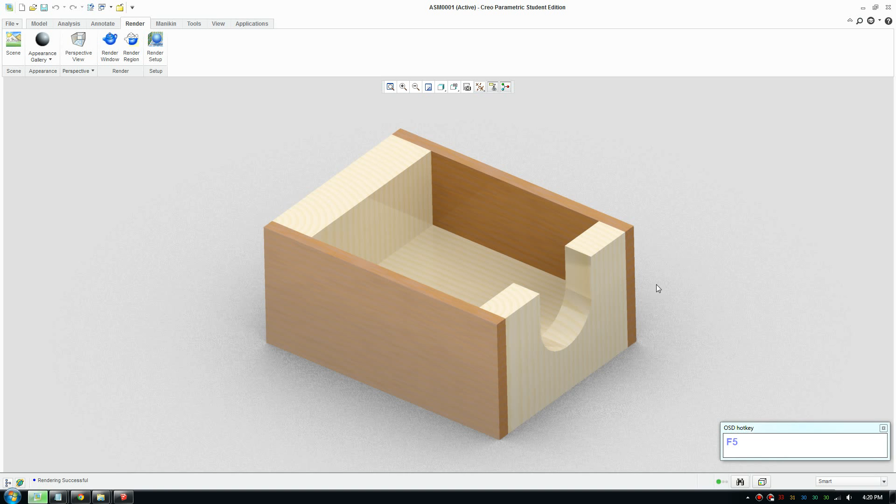Today I'm gonna show you how to model and assemble a post-it note holder. This is a simple product with only a few simple parts. I'll show you how to model them and also how to assemble them together, so just a quick simple product.

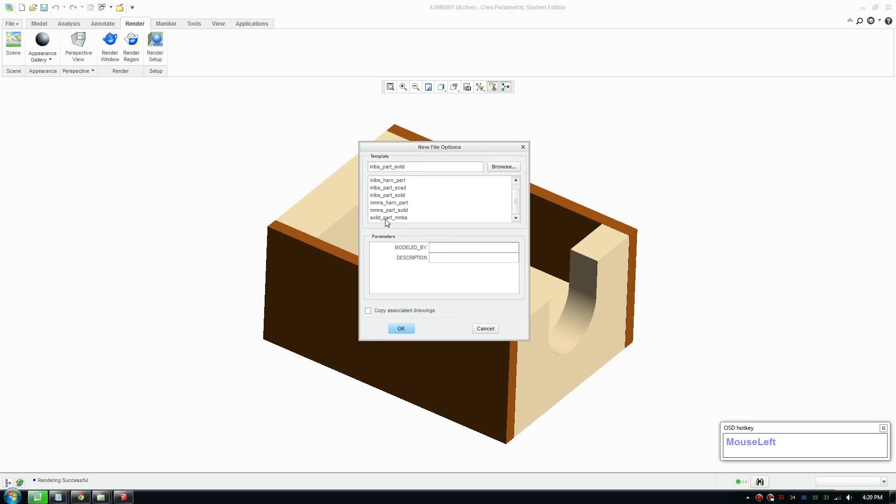So this is a post-it note holder. We're gonna make a new file, pick parts, and start with the front piece. Give a name, front piece, and make sure to untick use default. We want to select the solid part, millimeter, kilogram, second, which will make sure the units are millimeters, and we'll turn on the planes and the axis.

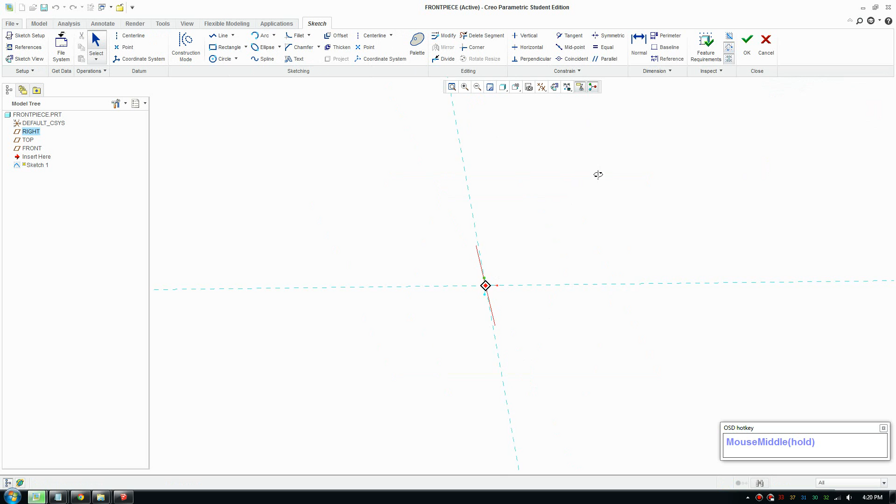We'll start by clicking sketch, click the front plane, and click sketch. We can click this button to flatten it out and create a rectangle, and make it 50 by 70.

Next we'll draw a circle somewhere in the center for us to pull the post-it notes out. Put in half the size of the width, so 35, half of 70, and here make it 25.

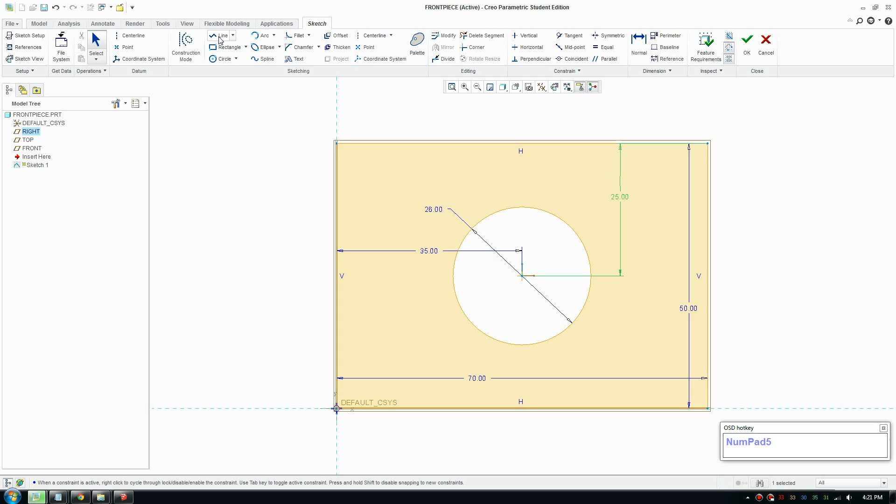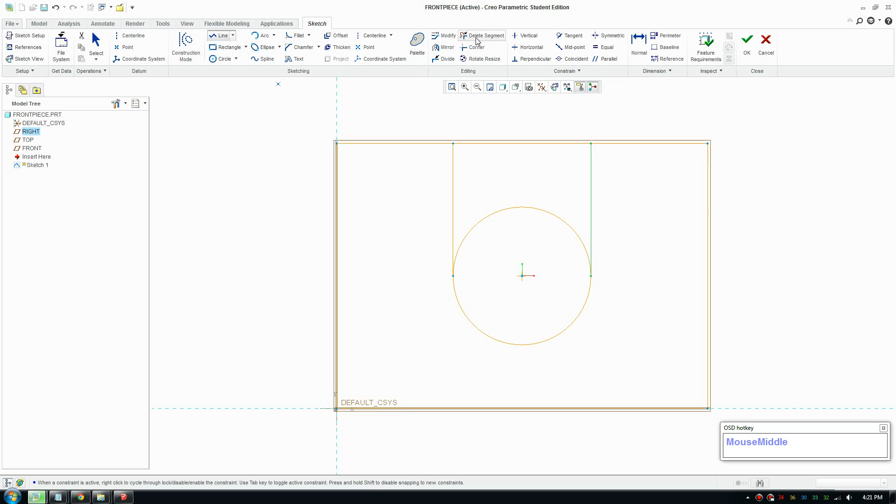Next we also use a line tool here. Press the middle mouse button to get out of it, start a new line, and make sure you select right on the side. So we have our lines and shape tools, our line modification tools here, and also this button here deletes a segment. We want to delete this line, so it makes a shape.

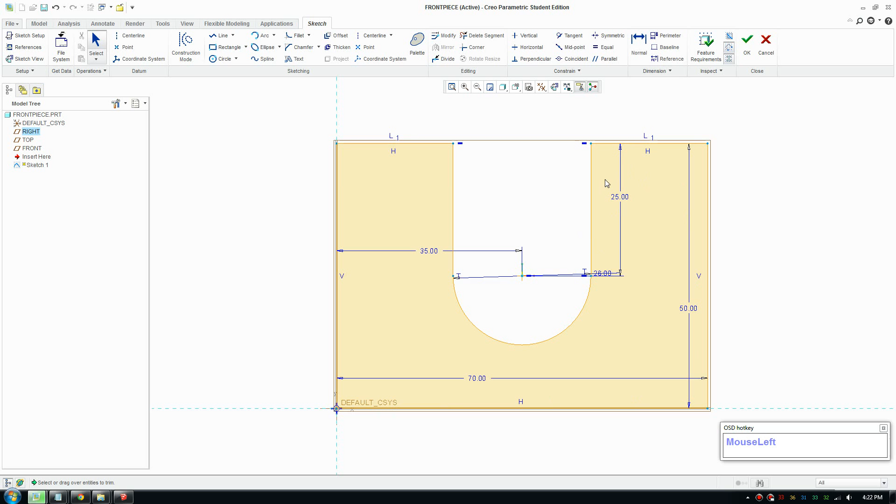Just be aware when we extrude things, when we click our sketch, make sure it's yellow like this. Make sure the shape is a loop all the way around, so it's a nice plain loop without any lines crossing, which is very important for the program to extrude correctly. If there's lines crossing over it, it'll leave an error for the mathematical calculation.

So here we'll just give a thickness of 12 mil. Okay, that's good. Now we go ahead and make the next piece.

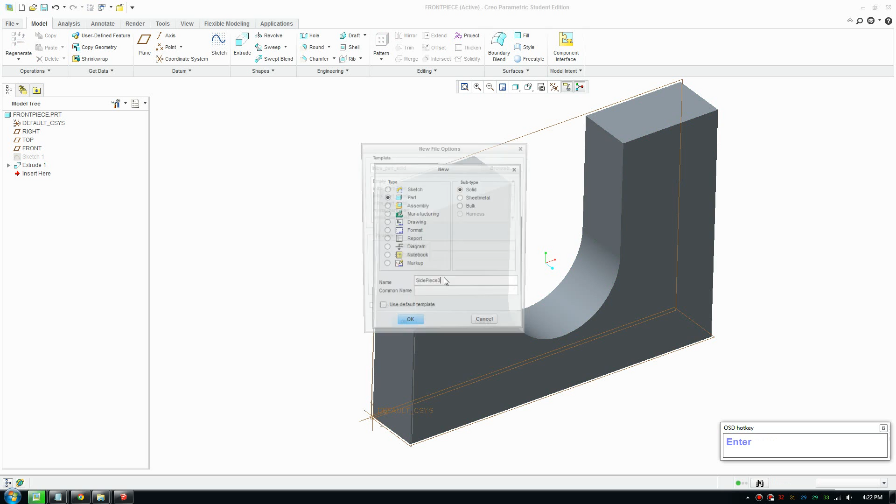Let's go file new again. We'll make another part, a side piece. For each part, if it's already in use, we'll pick another name, and make sure you untick default. Name it number 3. So basically each part in real life, you're gonna model as another part in Creo Parametric.

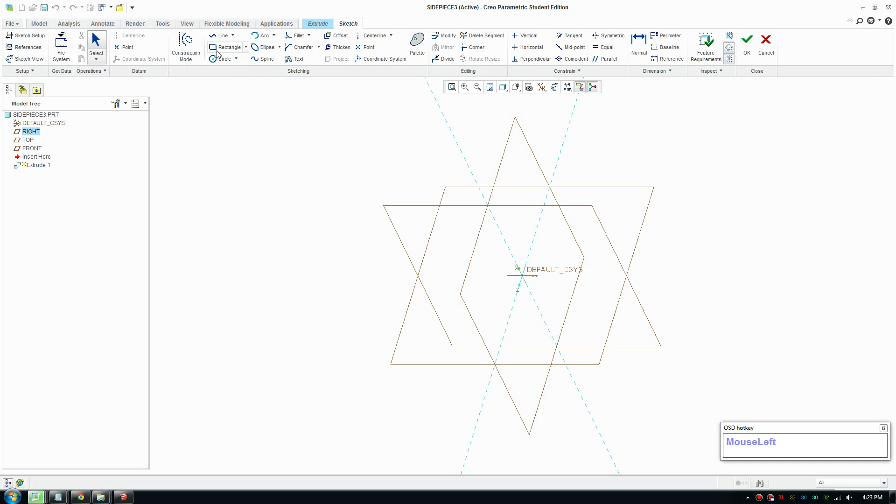Now we're gonna make a side piece, which is a simple square shape. So draw that out and draw a square shape. You can use the middle mouse button to rotate, and maybe click this button to rotate it flat.

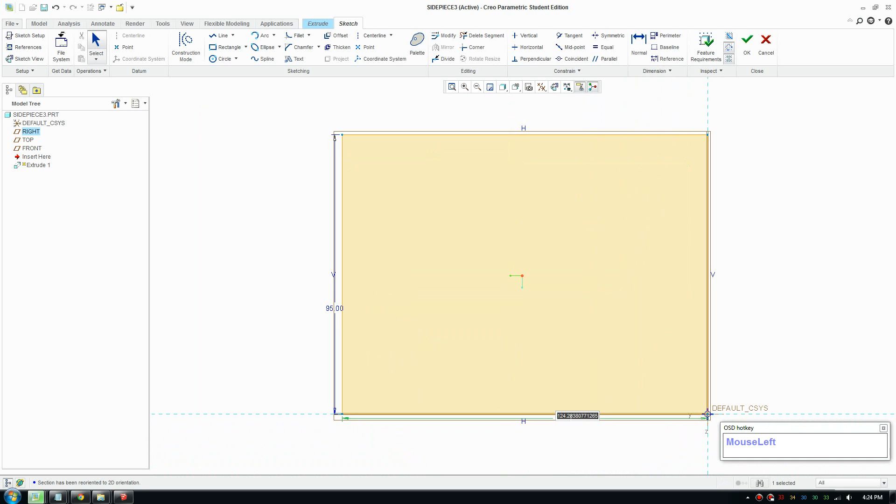And we'll give it a dimension. So the length is 95, the width is 50. It should be like that.

And we'll click accept and extrude. This little mark there will let us extrude. We'll make the thickness about 4 mil, since this is actually plywood. We're gonna use plywood for the side, and we're good with that.

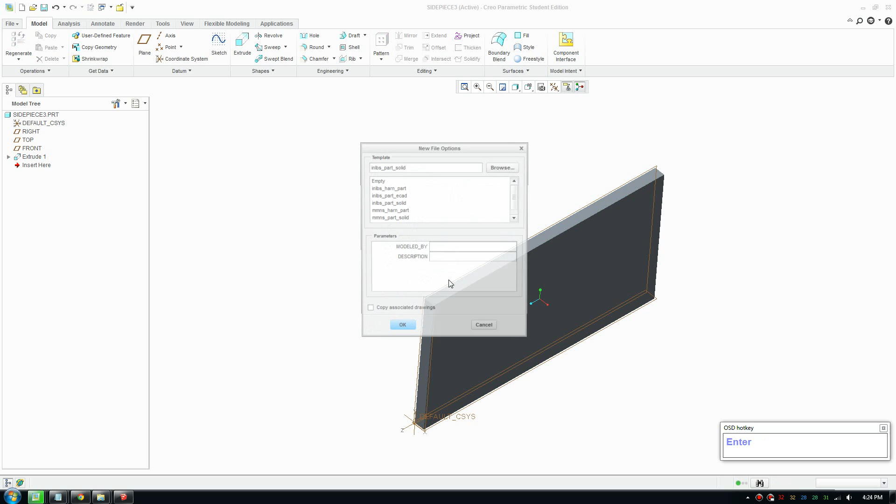Now we'll make the next one. So file new again, and next will be the back piece. Untick the box, give it another name, pick millimeters, make sure you get the units right.

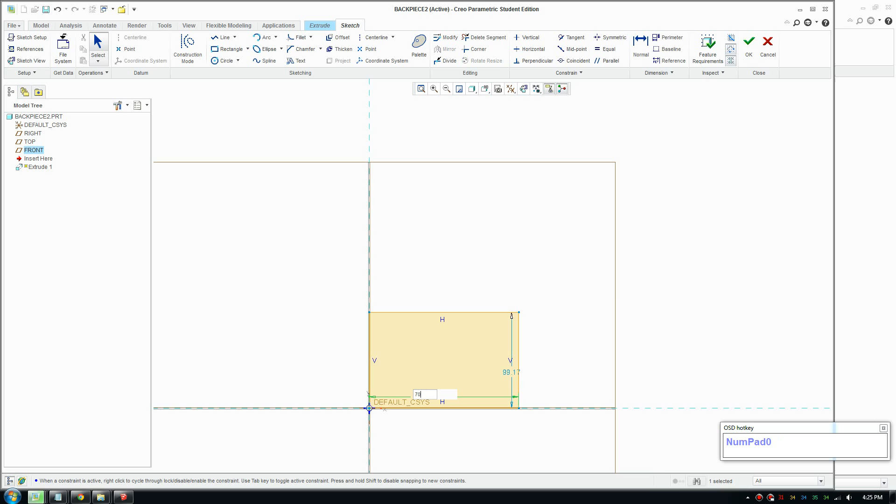Sometimes you can just go straight into extrude. Open the plane up and draw the back piece. Back piece should be 70 by 50, and accept that. And this time it's 18 mil.

We'll want to make a different type of timber for the back piece, and accept that, and we have pretty much everything.

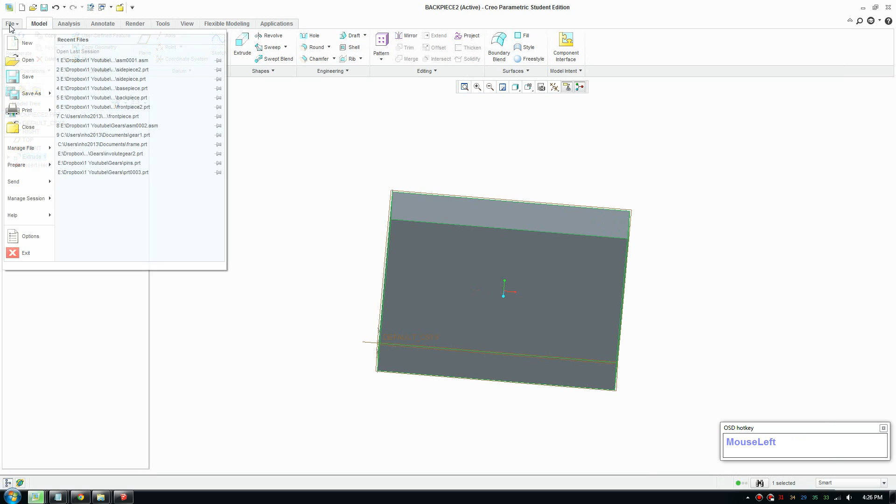Okay, so we'll have to make one more piece, which is the base. Give it a name, click OK. If it's in use, give it another file name and switch to millimeters.

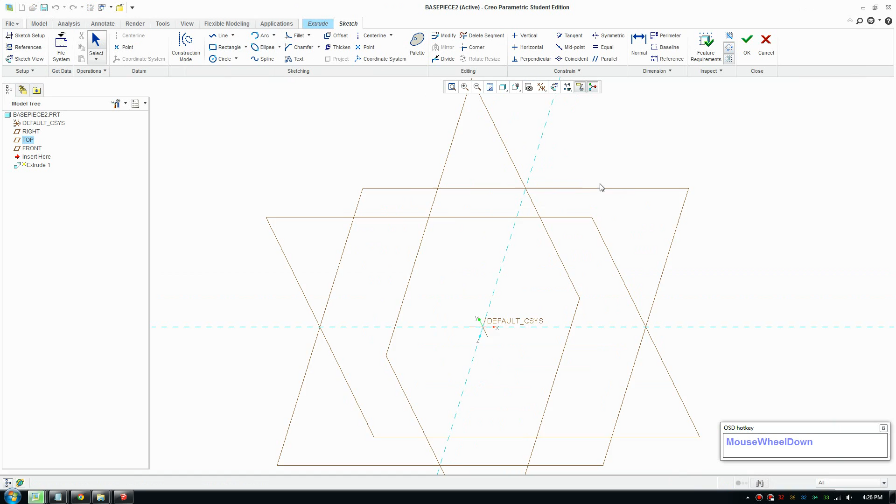Click OK. And for the base, we're going to use the top plane just to make it associated with the orientation. The base piece, we know that it's 70 width and I think it's 77 height.

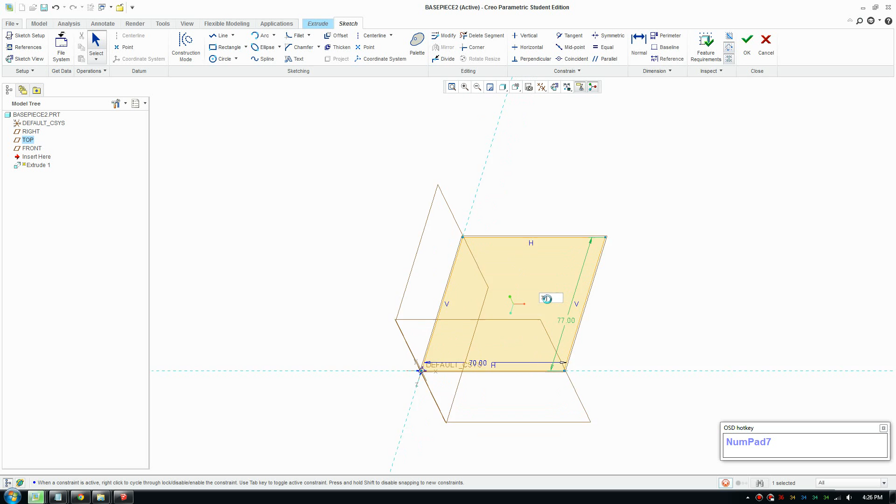Let's accept that, and this time we're gonna use 18 mil thick timber. And accept. Now we're ready to assemble this together.

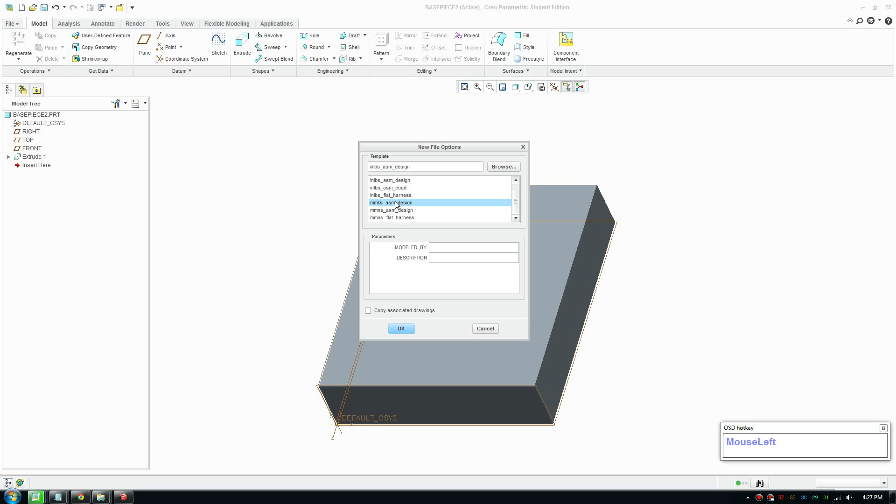So go make a new file and go to assembly. Assembly basically puts all your parts together. Untick the box on the bottom, and we want to use millimeters. Click the right units and we're ready to go.

Okay, alright, so bring your parts in. When you bring your parts in, make sure you pick the first one that is the primary shape.

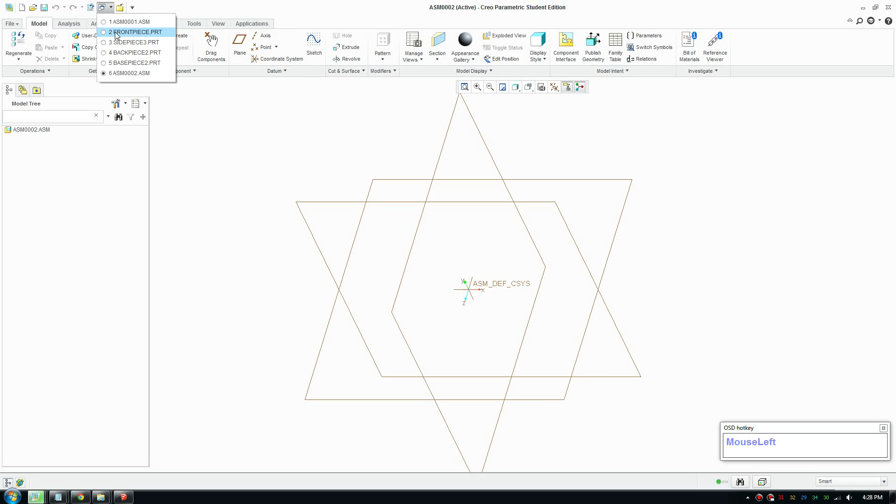Okay, looks like I can't find my files. I think I need to go and save it. So to go to your previous file, you click this button and switch between the other parts, and go file save. I'll save this in my documents and I'll move on.

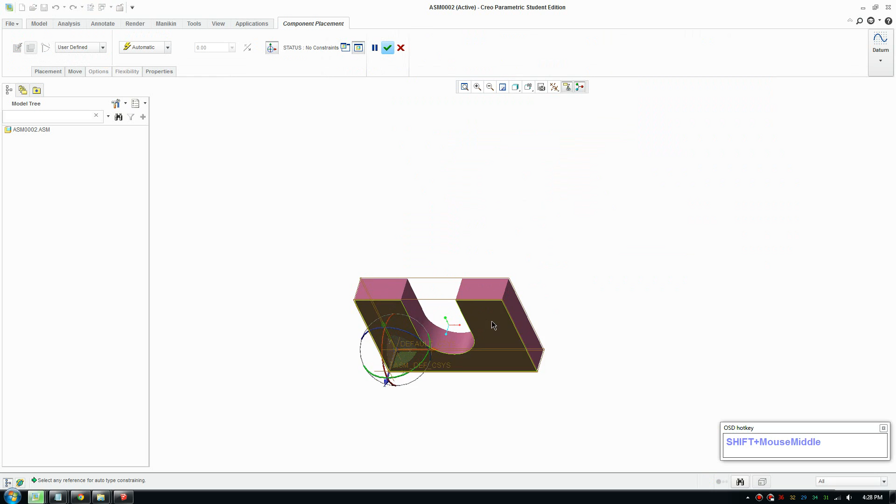Save your next one, back piece, save it all in the same folder, my documents, and we'll go back to assembly and bring in the first piece. So the first piece is the front piece. Alright, so be aware for the first piece we gotta put it into the default.

Default just matches the 0 coordinates with the part and the coordinates of the assembly. So that's fine. I'll bring in the next one, which will be the side piece.

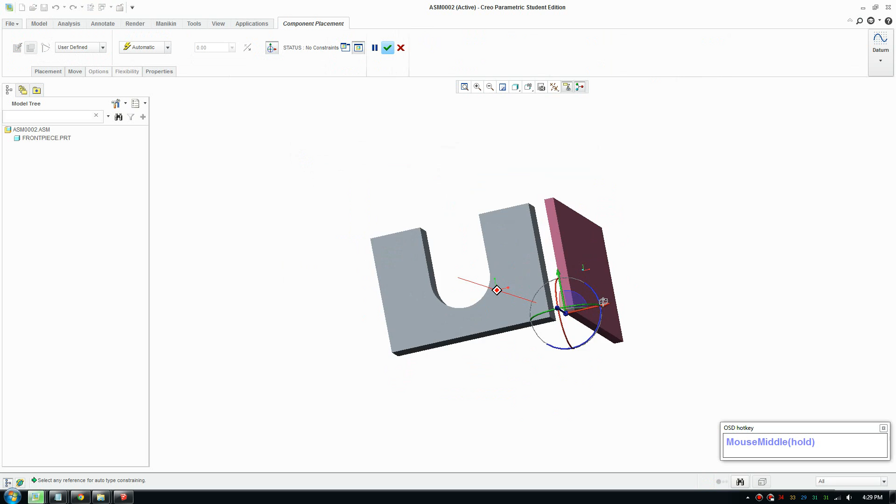Now I'm going to talk about constraints. Constraints basically define how the parts are connected together. There's a range of different ones, but today we'll just use rigid. It will connect together by glue or something like that.

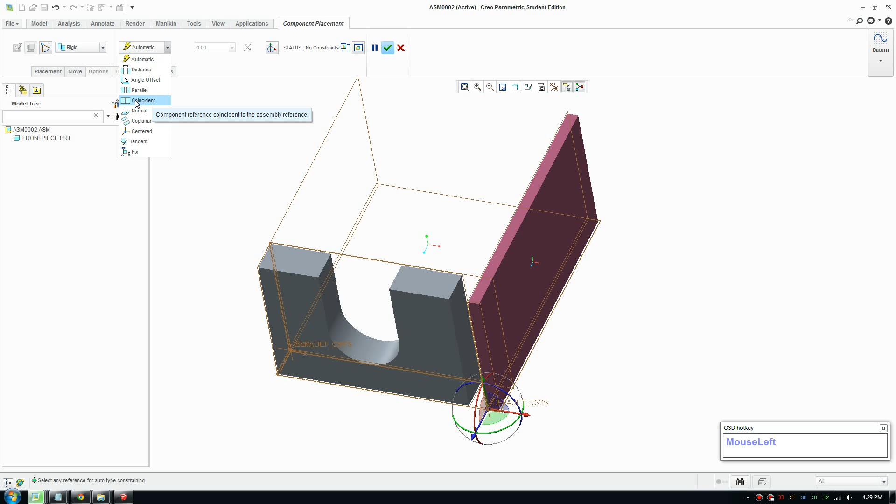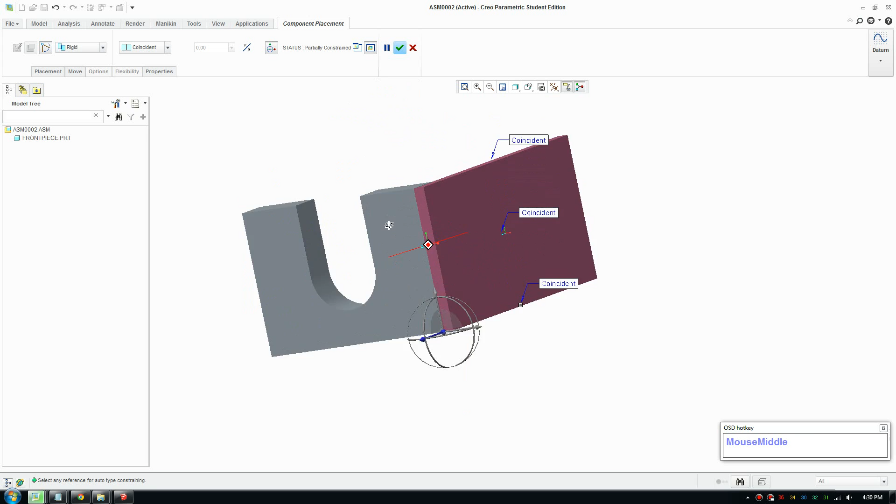And we're going to use coincident. Coincidence means similar, it's another word for similar. So if you leave your parts close together and click the similar faces, so these faces are facing up, we need to define three or four constraints. We don't want to go past the front, make sure it aligns with the front, and we need to define it so it turns yellow like that, so it's fully constrained.

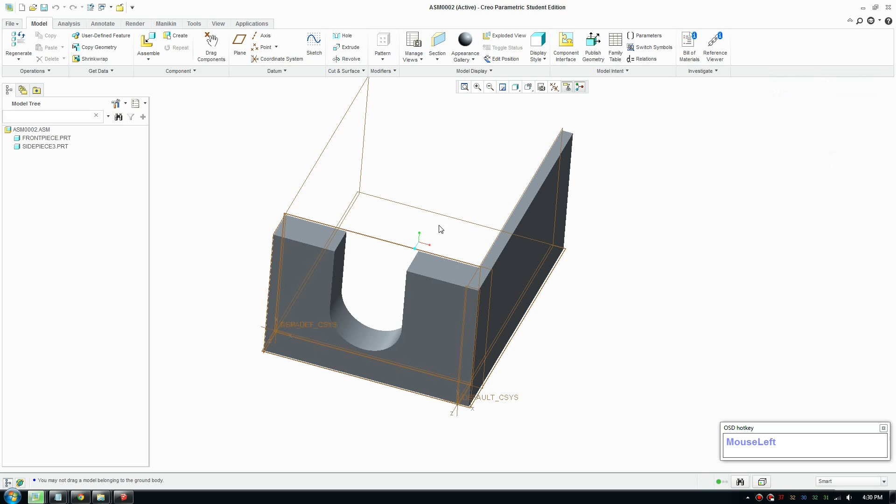That means when we move it, when we click and drag, it doesn't move or fly anywhere, so it'll stay there where we want it. And when you use the side piece again, you can drag the arrow tool to bring it where you like.

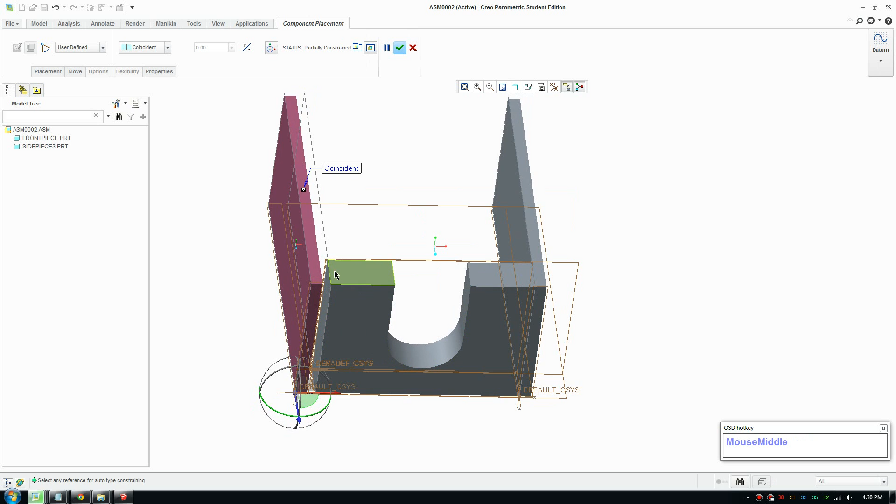Make sure you position it so it's in the appropriate place. So you can leave it as automatic and pick the surfaces. I pick the top so it's aligned with the top. Both top surfaces are similar, it doesn't go past the top.

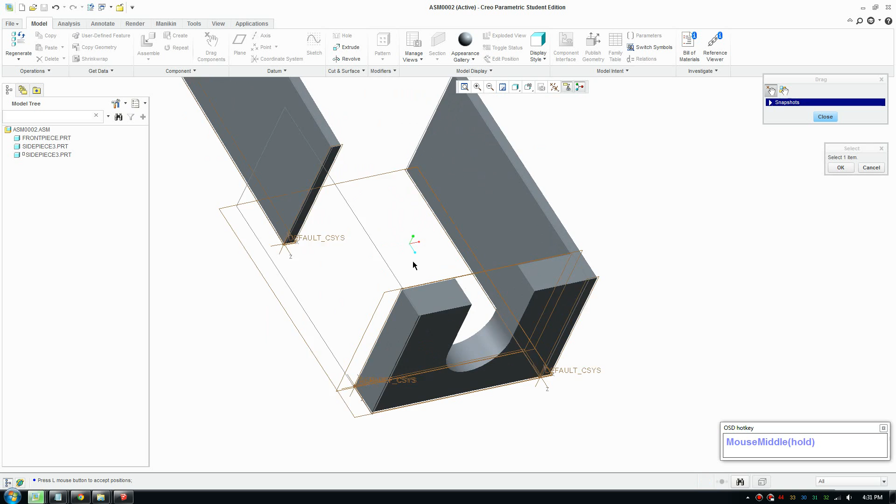Right now I'll just show you what happens if you don't constrain. If you don't constrain it and you drag it, it goes everywhere. It's constrained at the top but not at the other thing. That's why we need to constrain your parts.

To reconstrain it, we can right click the part, go to edit definition, and drag it into the right place. To edit the constraints, we open the placement here, and we can make a new constraint. For any part, you need at least 3 constraints.

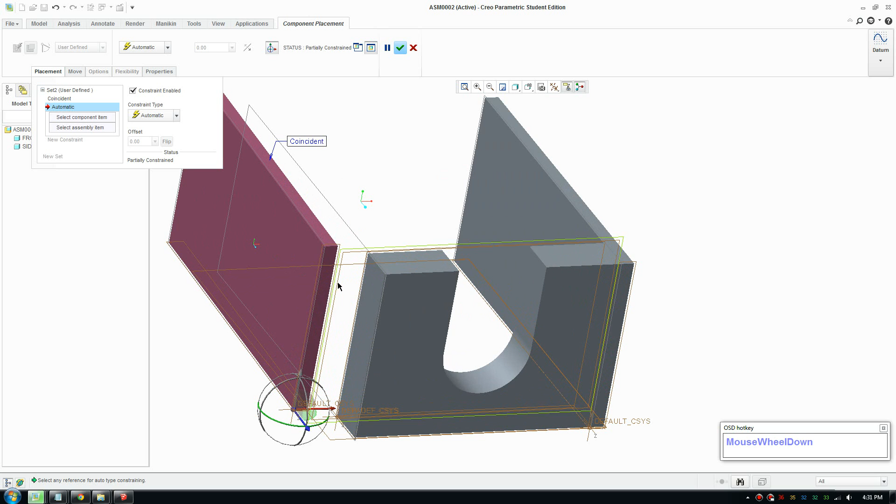We want the front face and the front face to line up. We want this face and this face to connect, and now it's yellow. Okay, we're pretty good there. Now we'll go next again. Actually that's done, it's already constrained.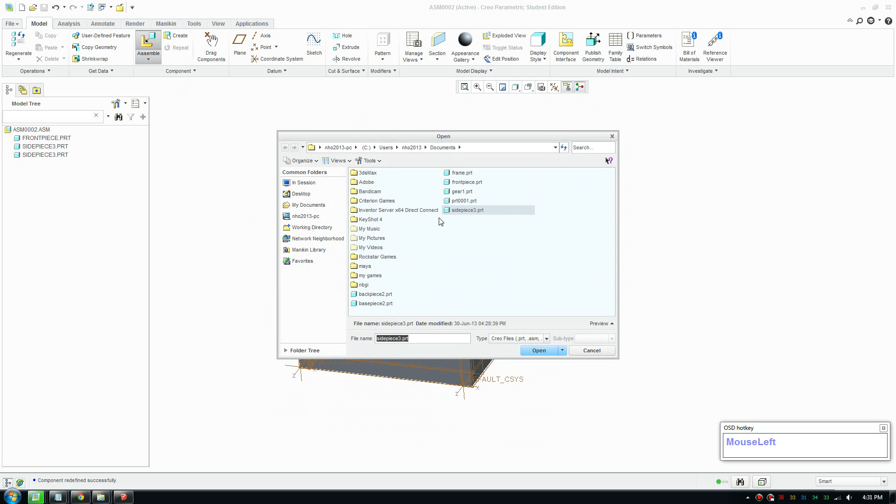Now we just bring in the last two pieces. I'll bring in the back. Which one was that? Back piece 2. The reason you need to put it in the right position is because for the surface to recognize, they need to be placed in the right place.

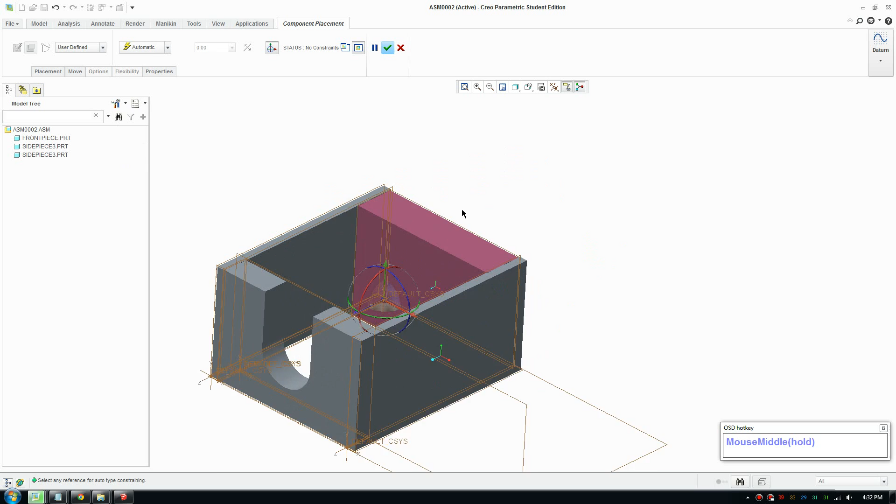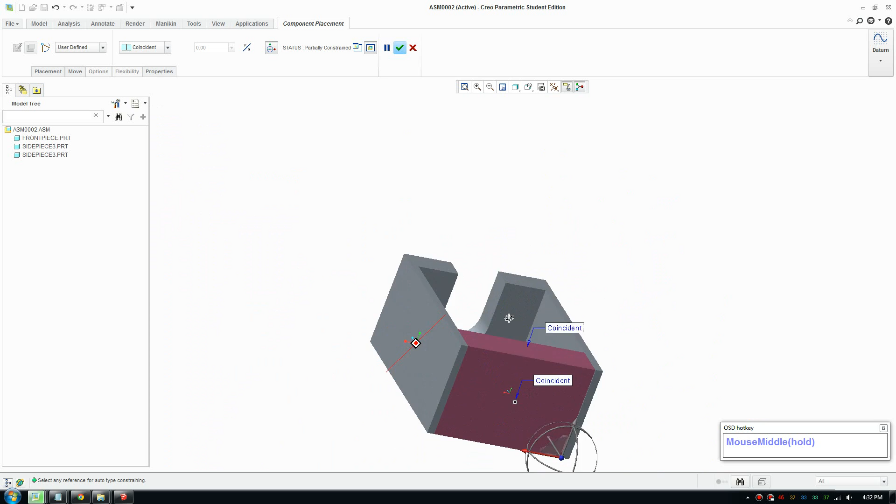So the coincidence relationship says coincidence there. They recognize the right angle and orientation. So we need to align the back face with the back face, so that lines up. And one more thing, we need to align.

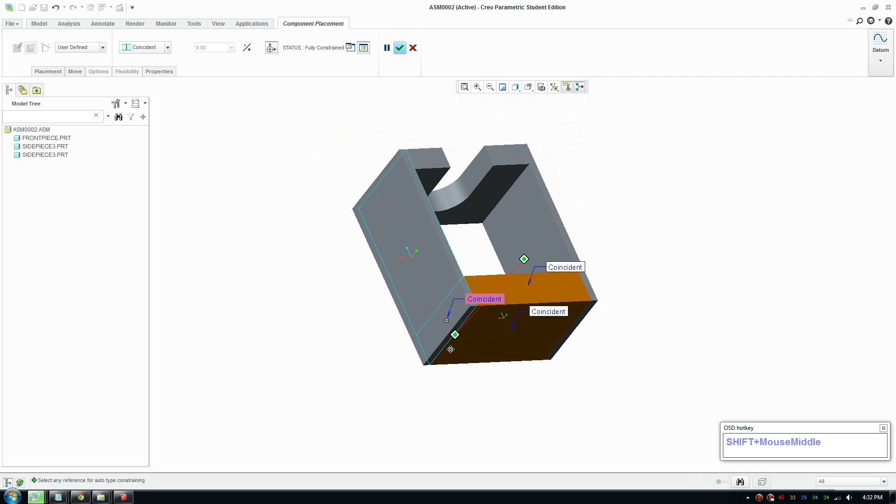If you right click and hold, you can pick from list, and we can select a different face. We'll select that face and pick from list again. We need the face from the back there. Okay, and there you go, it turns yellow, which means fully constrained.

And we'll bring in the last piece, which is the base. The base piece sits right in the middle there. We'll just leave it around there, and I'll show you how to constrain it again.

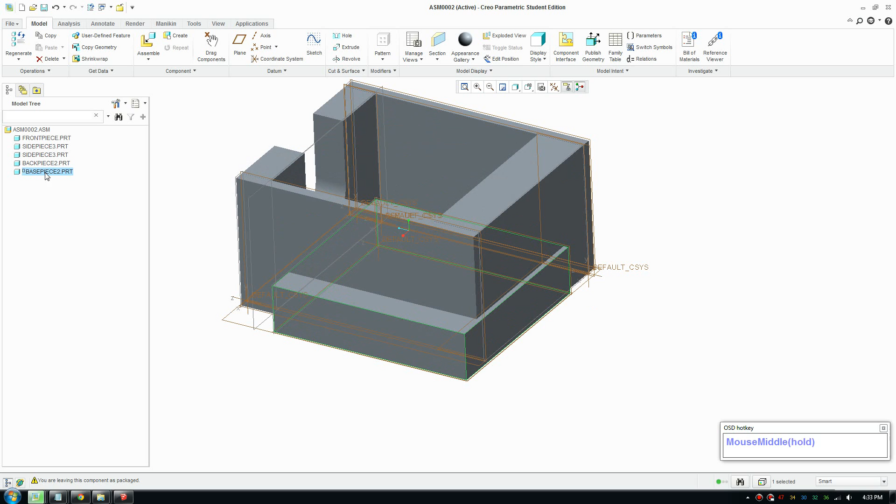If you bring it in and click accept, you can right click edit definition, and start working with the constraints now. So we'll line up the base with the base, line up the back with the back of this one, and the side with this side, and accept.

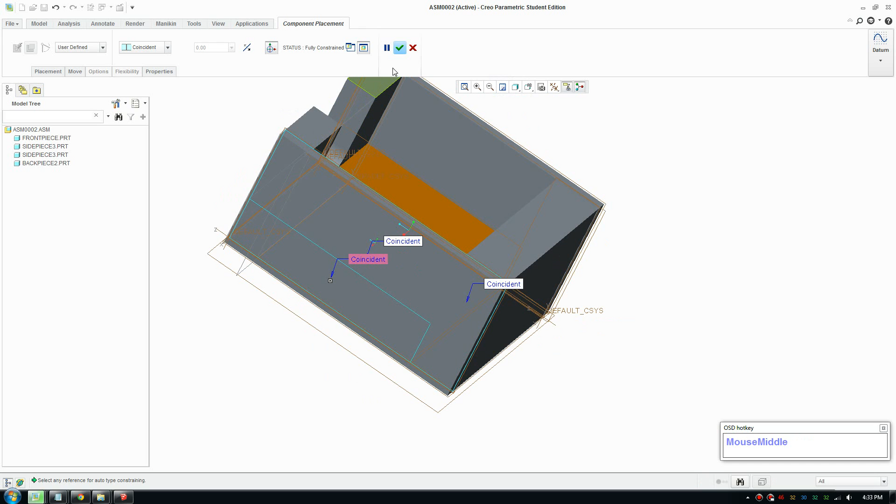So there's a problem with our model. The base piece is too long, it's passing the front piece. We can edit this in the assembly view. Just go click here, click tree filter, and click display features.

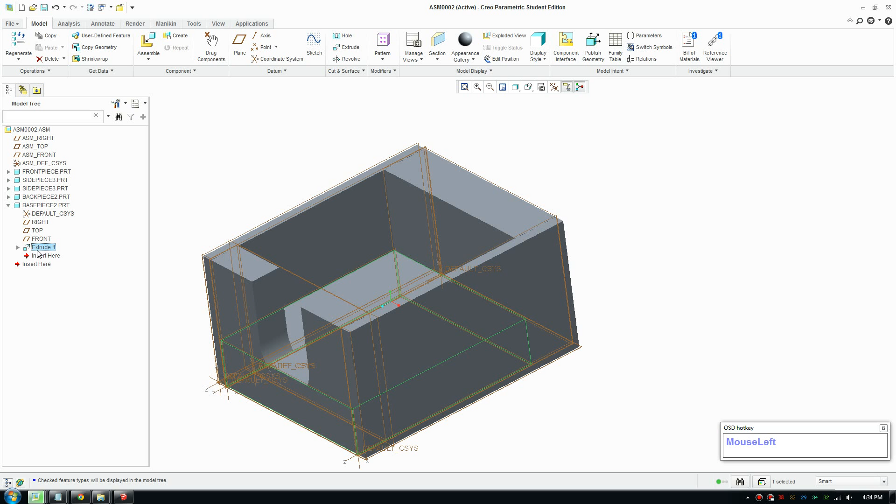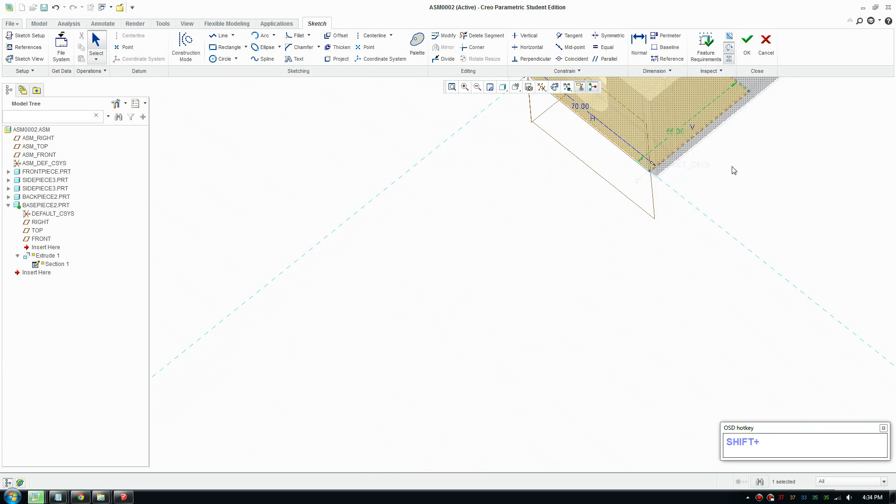55, is that enough? I think it's 65, and click OK. And we need to edit the constraints again, and make sure it's in the right place. There you go, all the things in the right place.

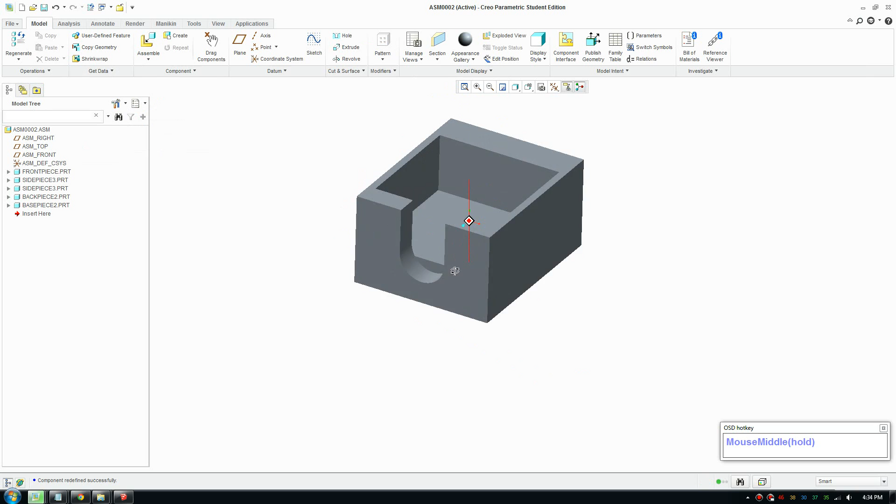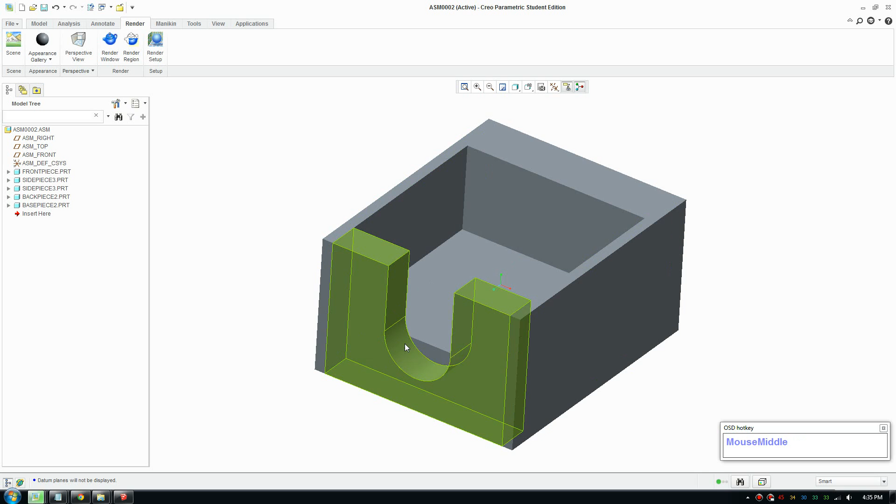And you can go ahead and fix the front part as well, but I'll just leave it there for you to explore. You can also do rendering as well, go apply materials and apply rendering settings. Have a look at the rendering tutorial for that, but I'll just quickly fix the front piece here.

We'll edit the sketch. This program's neat because you can edit in assembly, which is quite cool. So I think I'll bring the circle up, so it should be more closer to the back surface. But there you go, that's the tutorial there.